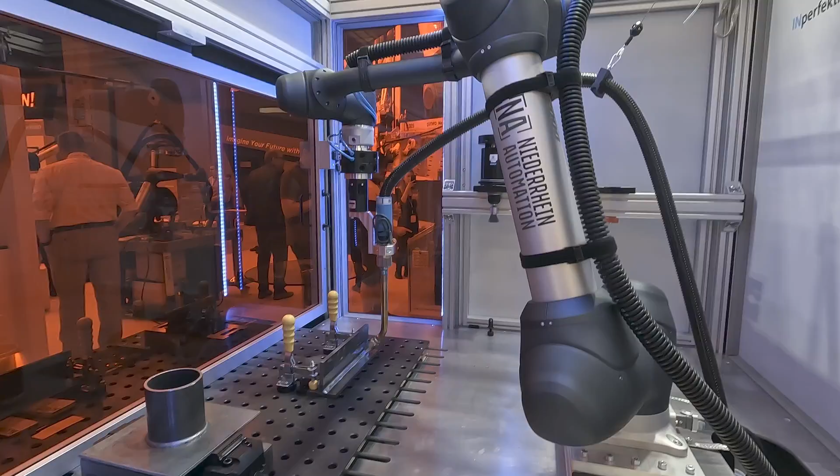I'm working with the company Cenit. Cenit is a German-based company listed on the stock exchange. We're headquartered in Stuttgart. We have 800 to 1,000 employees at the moment. We have several divisions. The majority of our business circles around digitalization.

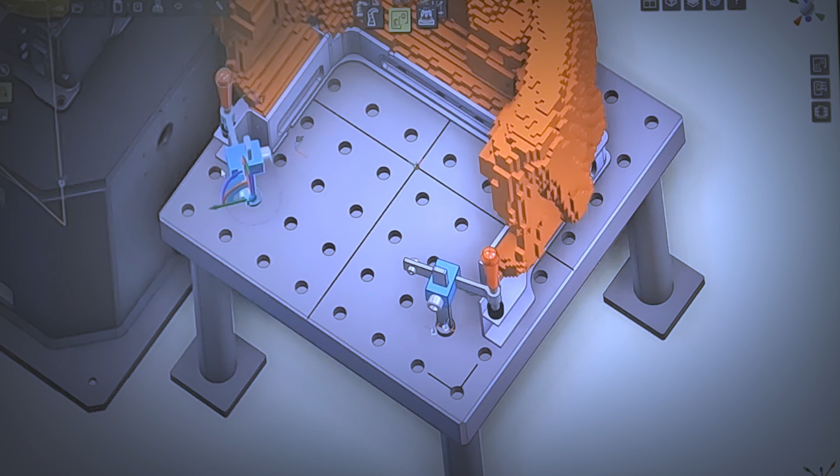We are developing our own 3D simulation product called FASTSUITE, which is in brief a 3D based simulation platform to enable and support automation processes based on robots, robot process integration, offline programming, commissioning. Technically, if you look at industrial robots and the applications, we have to provide an environment to build up this robot cell that we are looking at in a virtual world. So it's a kind of digital twin or a digital copy of the real environment.

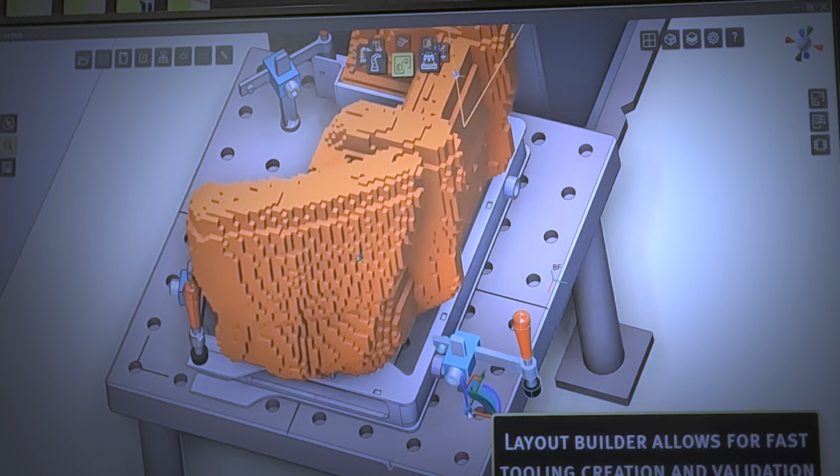That also includes that we have capabilities to include the toolings and the fixturings as mechatronic models. But then our focus is that we can directly load the CAD data from engineering and we use them for CAD-based path planning. We have a deep dive technology integration to support all the different applications like arc welding, laser cutting, gluing, painting, whatever. And at the end, we create the robot code, we can validate it, and we can make sure that the production runs efficiently.

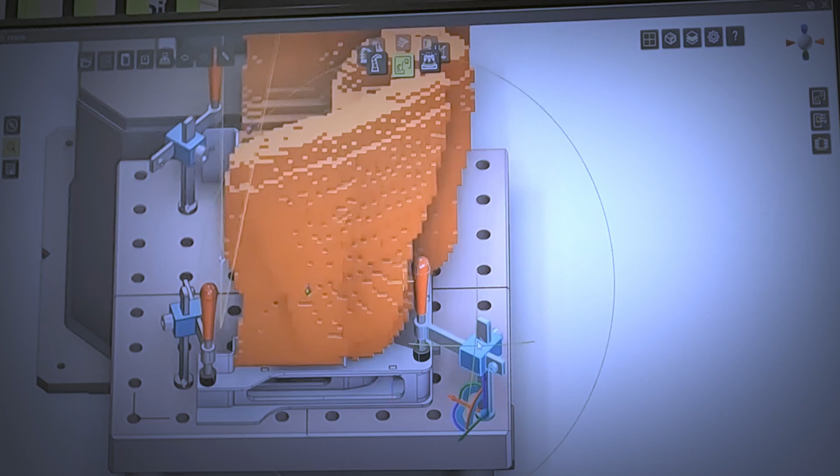There are several customer problems that we are solving. The biggest problem for customers is that by teaching robots, they have too much downtime. We give the promise to do it offline, to define everything offline, to optimize everything offline without interrupting the ongoing production. That's one promise. The second thing is to ensure a constant process quality no matter what operator is using the system. We have a shortfall of skilled workers, and the software enables customers to capture the manufacturing know-how in recipes and templates. Another aspect is also paperless process support.

So what we figured out is that in manufacturing, a lot of robot operators need to define processes that are previously defined in engineering departments. They type it in again. And we want to avoid that. We can also discuss with customers how we can, for example, directly reuse the already existing engineering information, not only the CAD data, but also weld line definitions or process points or cutting contours, etc., like a kind of feature-based programming. And we use that in order to have a digital continuity of the data from engineering to the shop floor.

We want to be as close as possible to reality when it comes to simulation, because we want to give reliability to the operators that what they see in the simulation is exactly what happens on the real robot. In terms of path planning, in terms of collision avoidance, reachability, etc., we have to be safe.

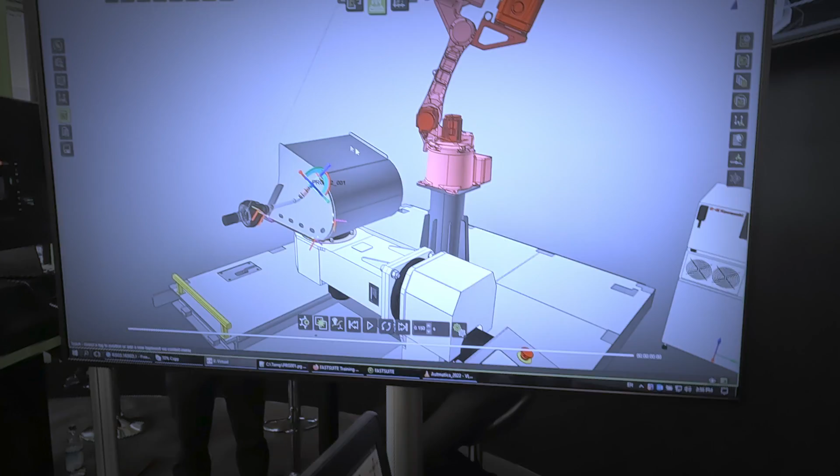A typical application is arc welding with robots. There are more and more companies offering standardized robot cells or special robot cells, and they are more or less standard for what they do. The cells don't change, but what is changing is the fixture and the parts. So when they produce something, they need to prepare the next job, and they can do it offline. And when the preparation is done, they make a download on the robot cell and they can start production.

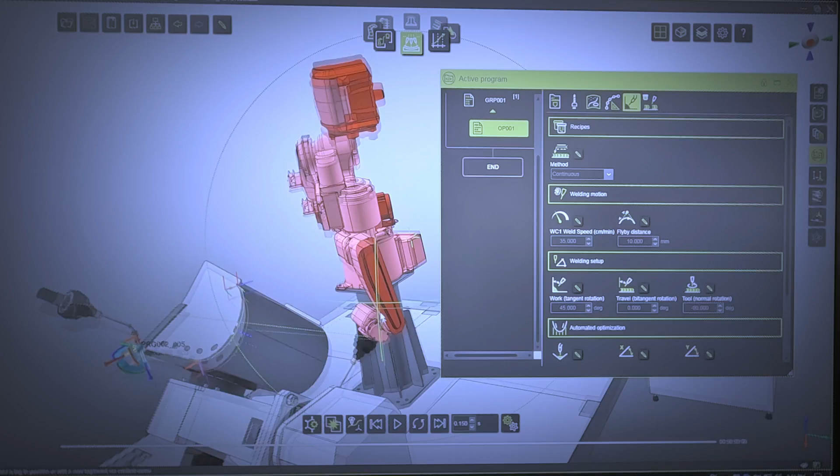The systems are getting more and more advanced also with regards to technology like sensors and cameras and vision systems, seam tracking, touch sensing, etc. And all this intelligence that you put in the robot cells helps to reduce the touch-up time on the robot cell. We do have customers that are very successful with an automatic offline process, no touch-up anymore.

Ooh, that was an interesting start. I never thought about how simulation could actually help you to cope with the lack of skilled labor. In the second part of the interview, I wanted to know if you can also benefit from simulation if you have a cobot. Because let's face it, this is how they are sold. They are easy to use, they're easy to program, easy to set up, so why should you even bother buying simulation software? But you will see there's going to be an interesting twist.

It's an interesting thing. For me, it is not a contradiction. So I understand that cobot systems come along with the promise that you don't need a software to teach them. You can teach them by dragging and indicating things, using the teach pendant to define the parameters. Yeah, but that means, again, no matter if it's an industrial robot or a cobot robot that you teach, that you stop production, you teach, and you interrupt your money-making process, and you prepare the next thing. So the argument of offline programming is also valid for all the cobot systems.

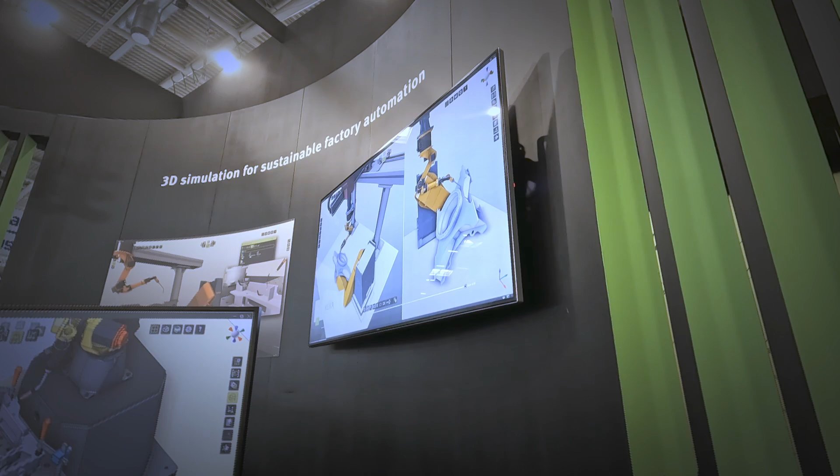And it's not a question necessarily of functionality, but also integration know-how, methodology, how to use it in order to take advantage of the capabilities that a software brings. And that's what we also do in addition to the pure software functionality. So this consultancy job, this process integration job.

I hope you found this interview with Jens Fetzer from Cenit as interesting as I did.